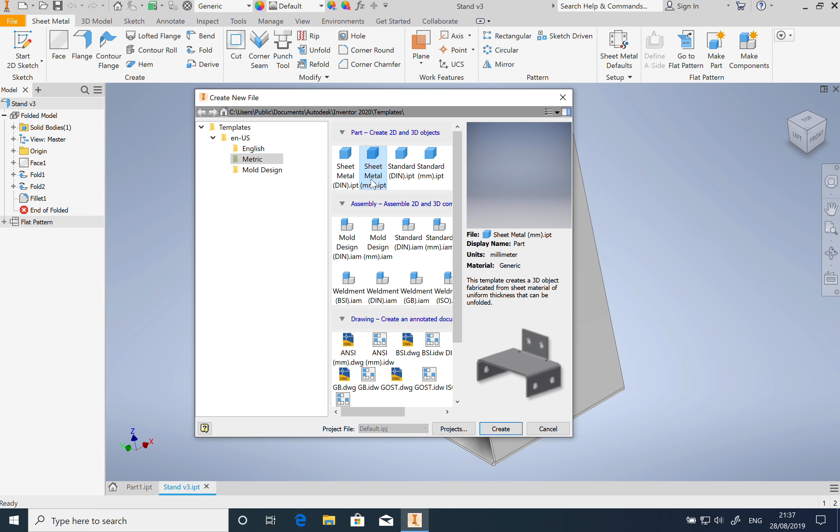Okay, in this tuition video I'm going to show you how to create the stand for the phone box. It's made in a slightly different way. So the first thing that you want to do is you want to go to File, New, and this time instead of a standard you want to create sheet metal, because that's what we are using. Make sure metric is selected and then that, and then create.

Okay, you can see that there's slight differences with sheet metal at the top, and face instead of extrude. The first thing you want to do is select sheet metal defaults and change this thickness: deselect that and put in 1.0 millimeters there and apply, and that's the thickness of our metal that we're using.

Then start a 2D sketch, select a work plane and select a rectangle, and a piece of metal is going to be 70 millimeters by 240 millimeters, and then zoom all and you can see that there. Okay, the next thing you want to do is you want to put in some construction lines.

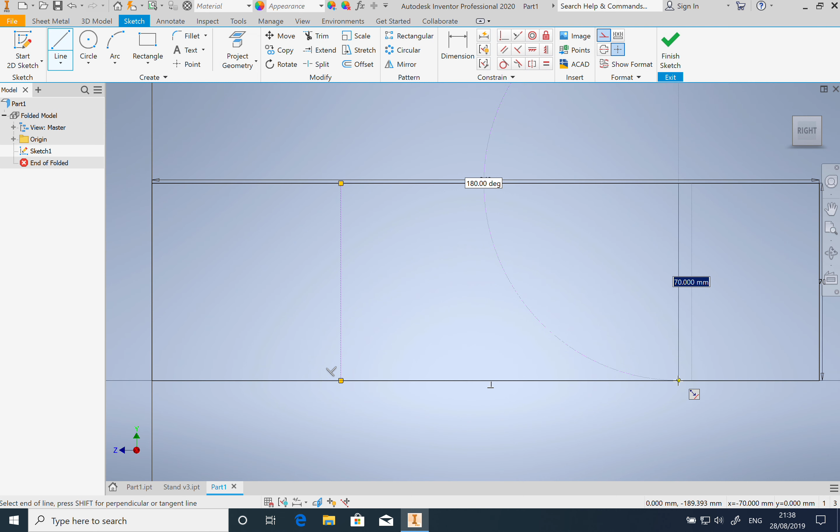So hit the construction button here and then select the line tool, and I want two lines going down, one here, they've got to be vertical, so check the angles to make sure that they're vertical, one line over here like that, and then one line going from the middle. If you make sure it's in the middle, you can see how it just gets a slightly bigger dot there when it's actually in the middle of that line, so that's how I know it's in the middle. And then check the angles to make sure that is completely horizontal.

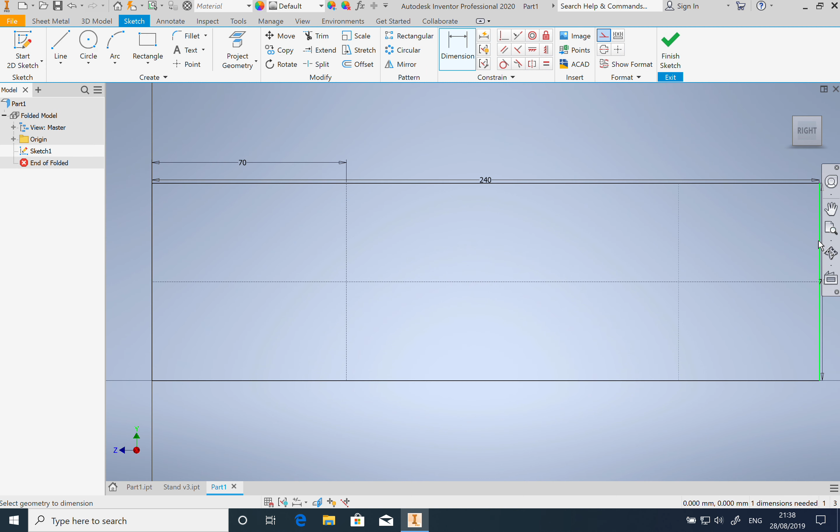Dimension that then. From this line to here, that needs to be 70 millimeters, and from this line to the end needs to be 60 millimeters. You then want to start drawing your holes, so select your circle tool, take off construction, and we want a 10 millimeter hole here. We're just going to put them in. 10 millimeter hole on this central line here, like that, and a 4 millimeter hole here, just like that, and then you want to dimension these.

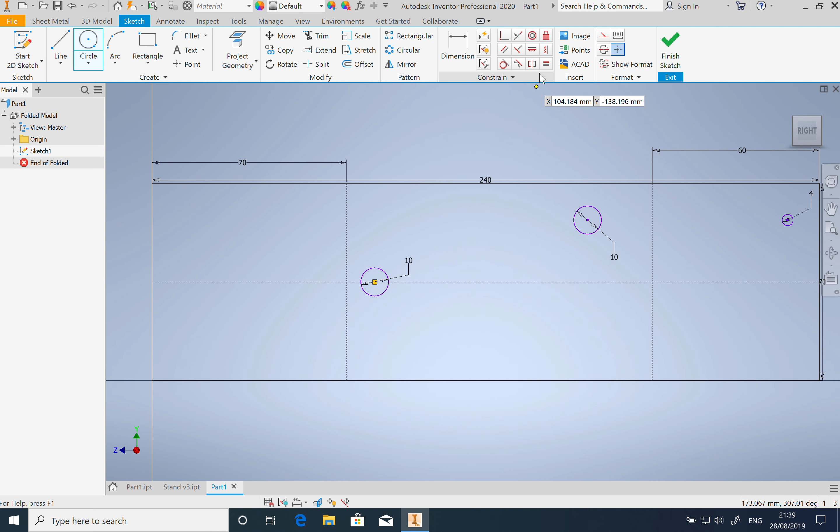So from this line to the center of that circle, that should be 36, and from this line to here, I've drawn that in slightly the wrong place, it should actually be 30, because that's going to move over. And then from this line to the center of the circle, that should be 15, and we'll just do that on here as well, just to make sure that is also 15. So they're both 15 millimeters away from this edge, this one's 36 away from this line, and it is 30 millimeters away from that line. They're all dimensioned against this line because that's going to be our bend line, and that's the important part. The last dimension is this line to the center of this circle, and that should be 10.

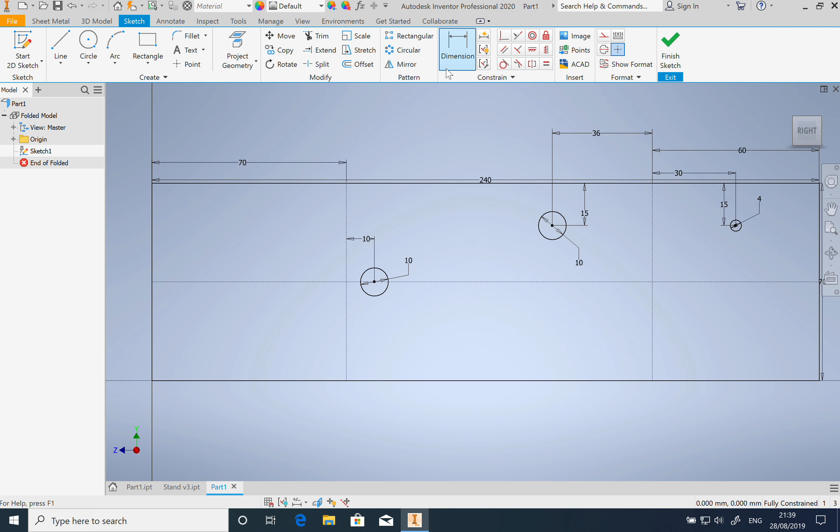Okay, then I want you to use the mirror button here, and then with this highlighted, you want to select the two circles that you want to mirror, then highlight the mirror line button, and then select this line here. Did it do it? There, and apply, and you can see, there we go, that's put those two in there, like that.

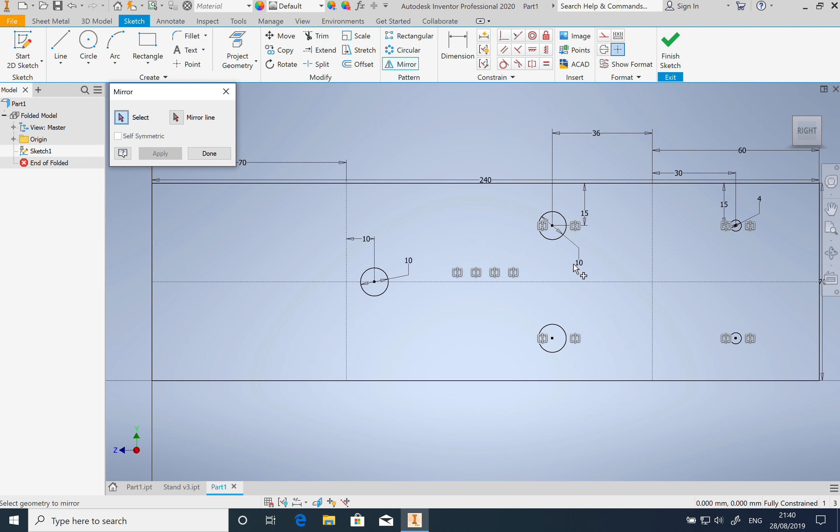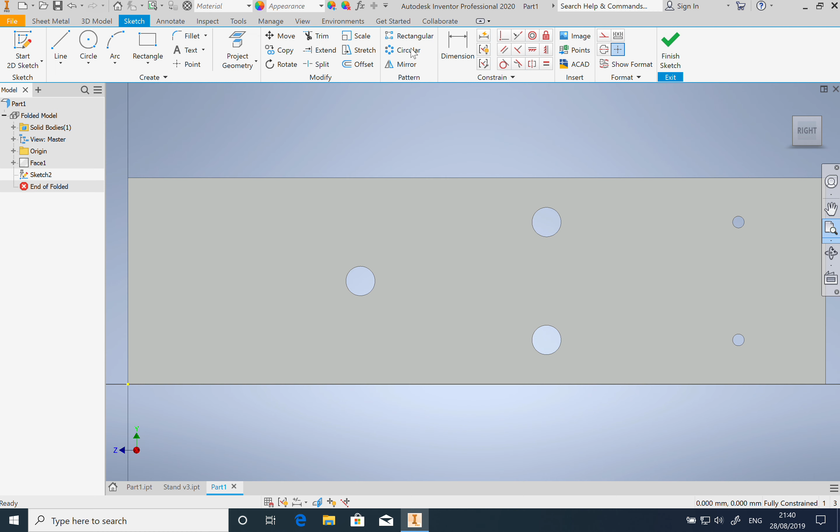Okay, get rid of that, and then finish your sketch, zoom all so you can see it all, and then click on the face button and select that area there. That now applies a 1 millimeter thick sheet metal to your piece of work. The next thing that I want you to do is go back and redraw those construction lines that you had, but just draw them as normal lines this time.

So just a line from here down to the bottom, okay, like that, escape, and then click the line tool again, and then it's roughly here down to the bottom, and you can see that's not quite on, it's kind of, there we go, it needs to be exact.

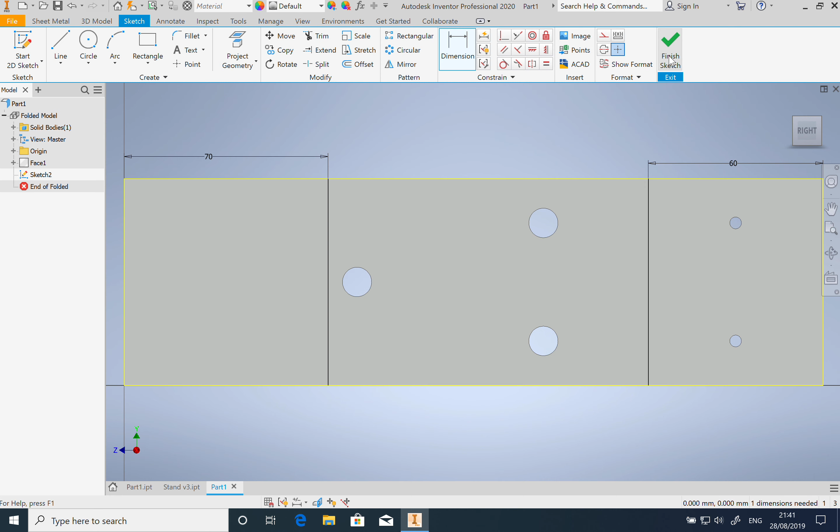Alright, both those lines are now perfect, so dimension from there to there, and that should be 70 millimeters, and then from this edge to this edge, and that should be 60 millimeters. I probably only need to do one actually, because I think you have to redo them every time you do a bend. Okay, so we want to now do these bends that we're talking about here.

So we're going to look at bending this around that line there, and you can see, well, we call it fold. Okay, so if I double click that one from the 70, you can see that's 105 degree bend around. Okay, so we're going to just come around and we're going to use this fold button here, and the first thing it asks us to do is select the bend line. So there we go.

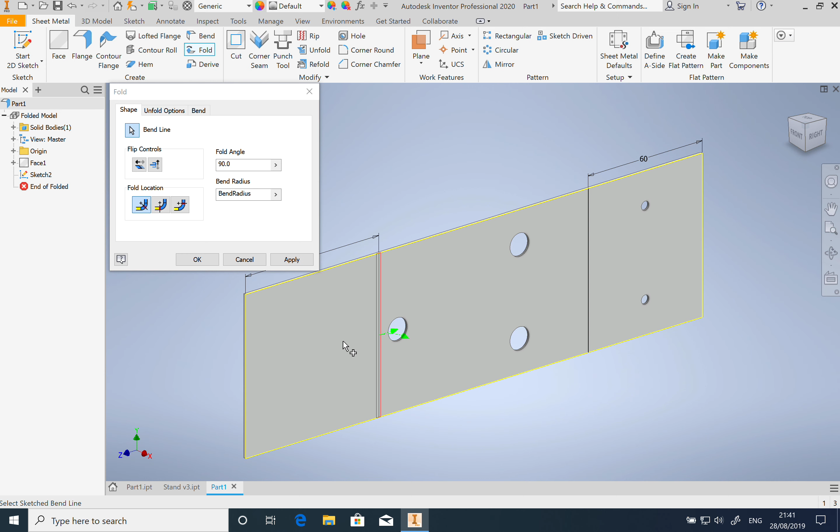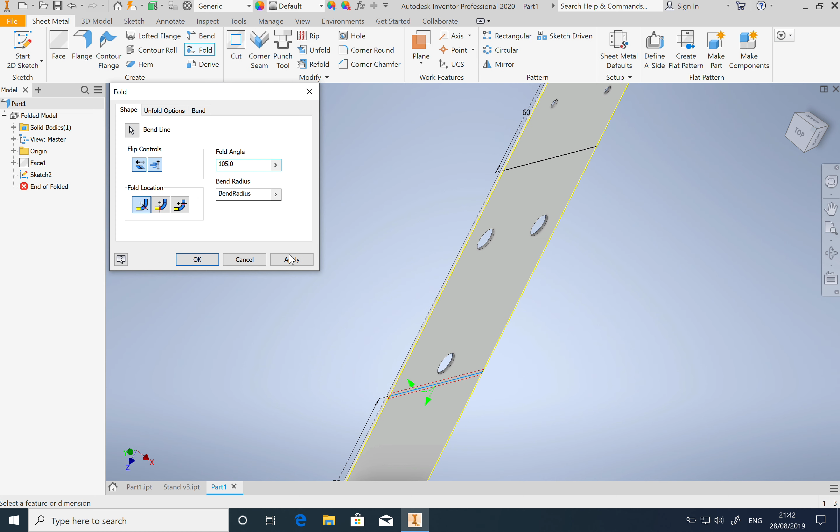Okay, then it wants us to know which direction we want to do, and let's just turn this around a bit so we can see which way it's kind of looking at going. And we can kind of play around a bit with this until we think we've got it correct. Okay, so there we go. I've clicked these until I feel like it's going backwards around that way, and I'm going to change this to 105 and apply. You can see that's bent that around there.

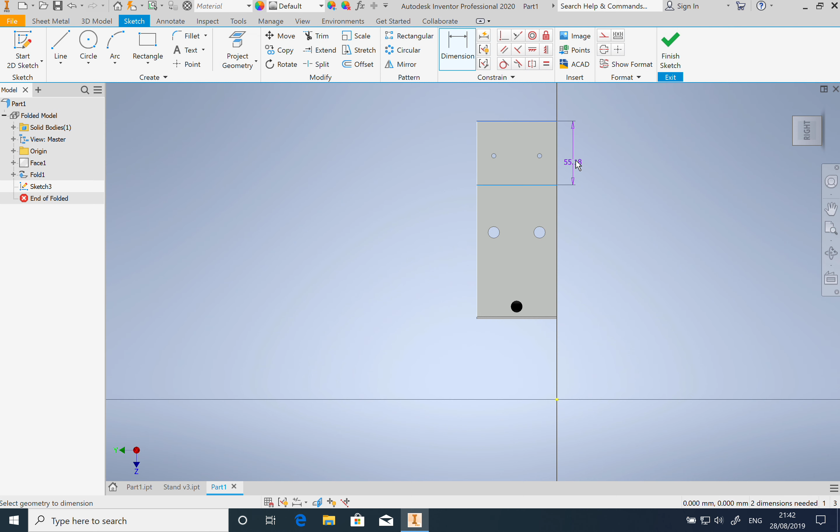Now I can't see this line anymore, which is a bit annoying, so I'm going to have to redraw that 2D sketch on here, zoom out and zoom in until you can kind of put the line in properly. So that now wants to click on there, cross like that, make sure you dimension that from that edge down to here at, I think it was 60, finish your sketch like that. Now I can see that line.

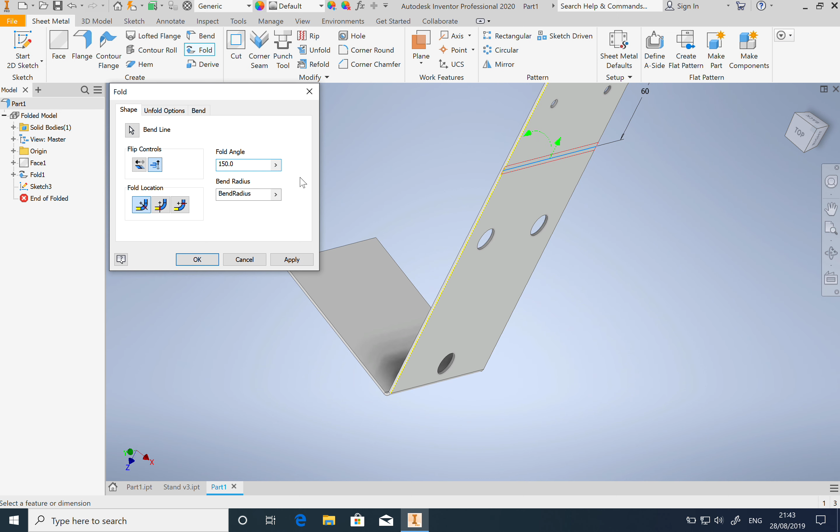I'm just going to check what the dimension was on here. So the second fold line was 150, so we can now just go to fold, select our line, kind of change these until they feel like they're going the right way, and change that to 150 and apply. Okay, there you go.

The last thing that we want to do is, you might like to just fillet some of those hard edges because it is metal. So we'll just go and see if we've got a fillet button. I'm sure there is one somewhere around here. Maybe you can find it and you can tell me. Oh, let's go to 3D model. There's a 3D model button. Fantastic. So there should be now a fillet button there.

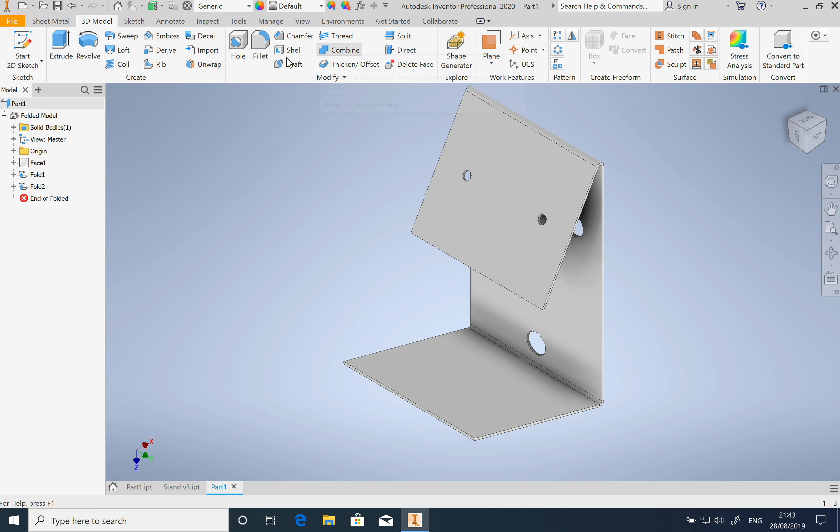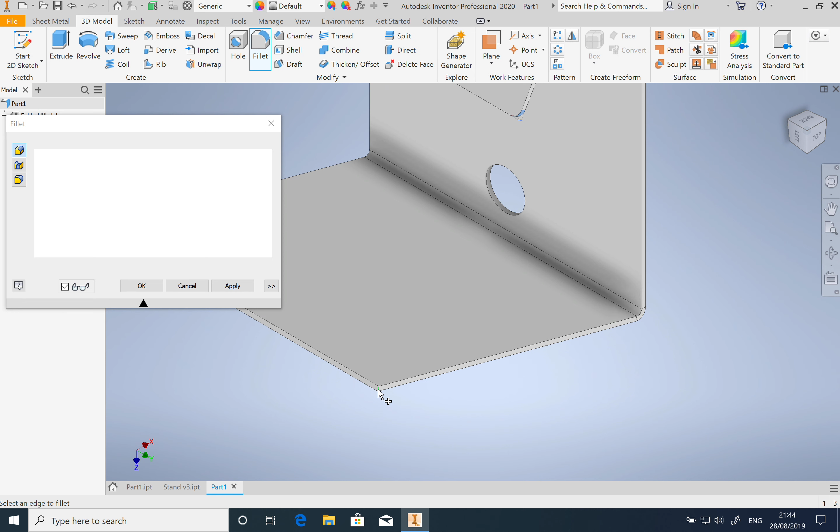Make sure that's 2mm, and you can just zoom in on these edges just there. Yeah, perfect. Look at that. And then just here. Good. And that's what you would tend to do, just to round those edges and make them feel a little bit better.

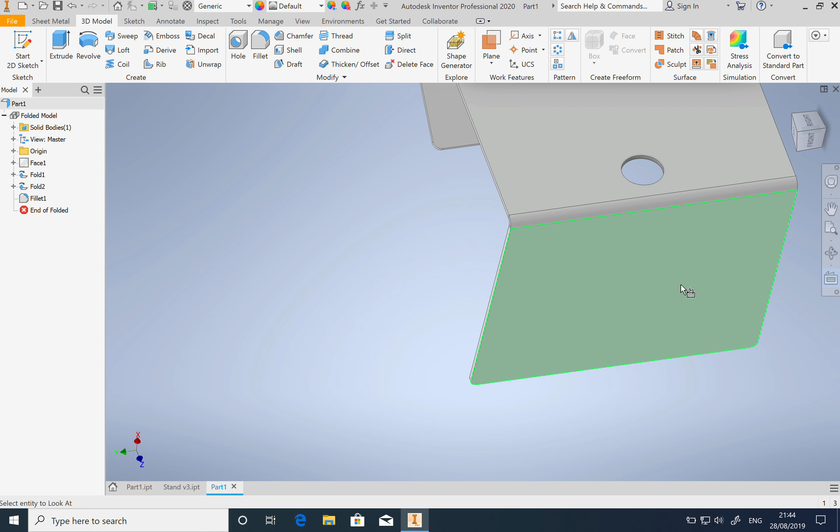Okay. And then lastly, if you want to try and assign a front to this, it can be quite hard because we've got no edge here on the front to select. But what we do have is a bottom edge. So if we just come up to here and we select this face, you can use this button to then select that face, okay, like that. And then I can right click on this and I can set current view as top.

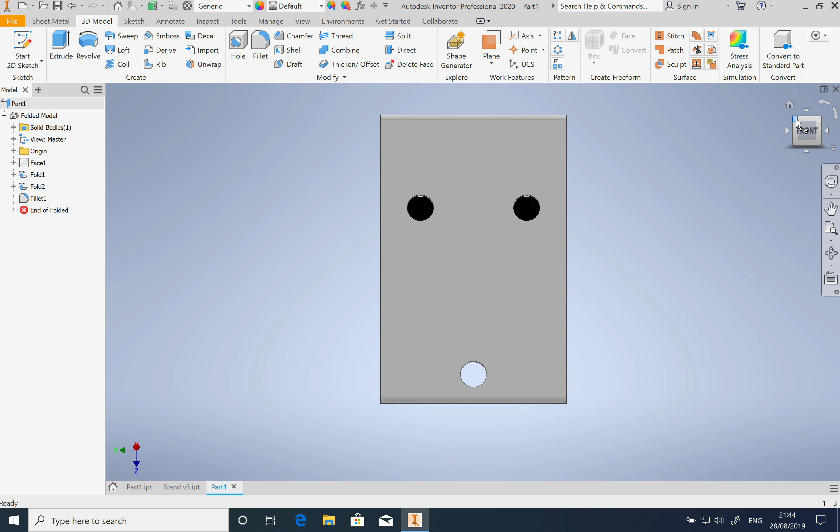Now I can rotate that around to there, and I can go set current view as front. Now that's perfectly set to be my front, and then I can right click on the home once I've got it all in line and set current view as home, and then make sure you save your work.